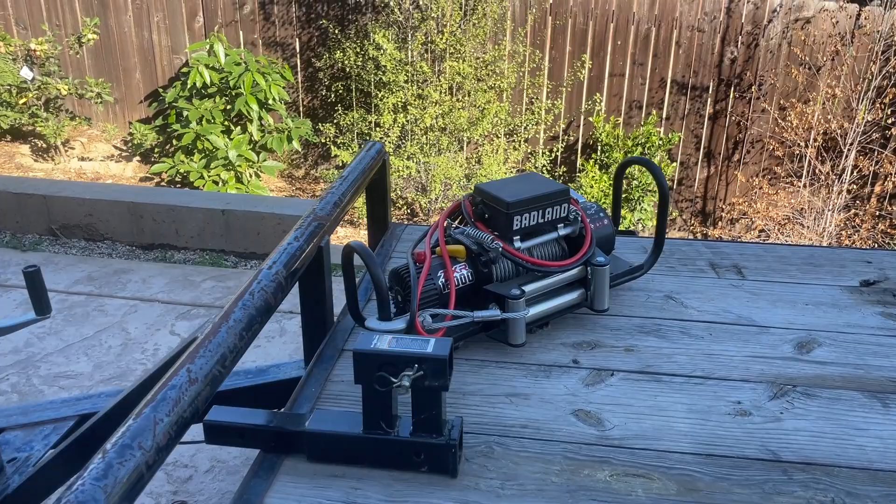I got these parts. So this Badland ZXR 12,000, man, that thing's huge. This thing's pretty badass. It pulls a lot, but we need to put this thing on the trailer, and I have it hooked up to this other part you can get from Harbor Freight to make it to where it'll go into a trailer hitch.

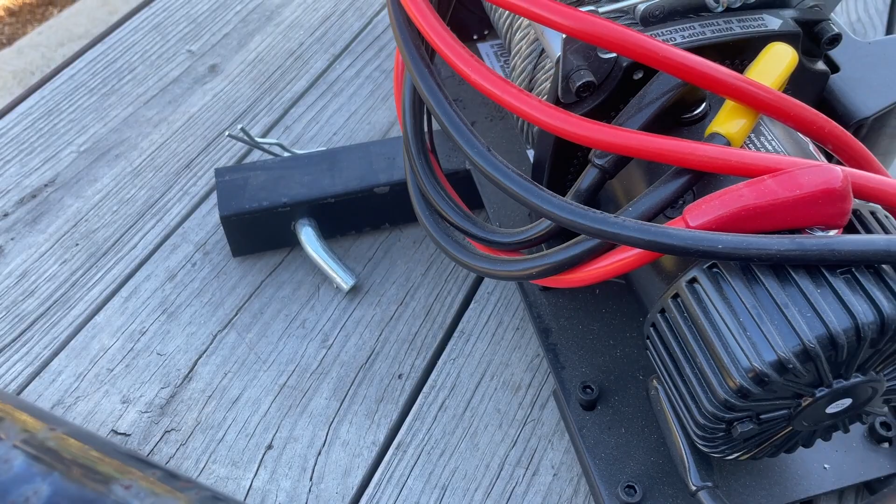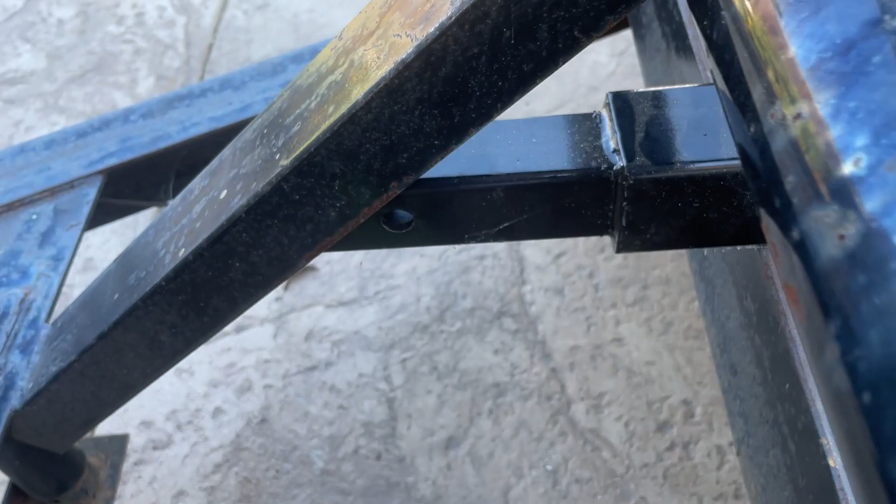I got this thing from Harbor Freight, which I wasn't planning on using for this, but it actually will work out. What I'm gonna do is push this thing up into my trailer. I'm gonna cut the end off over here, weld it in over here, again with our Harbor Freight welder. And I'm gonna bring this thing in, radius this and weld it to this top tube, and then it should be pretty good and durable.

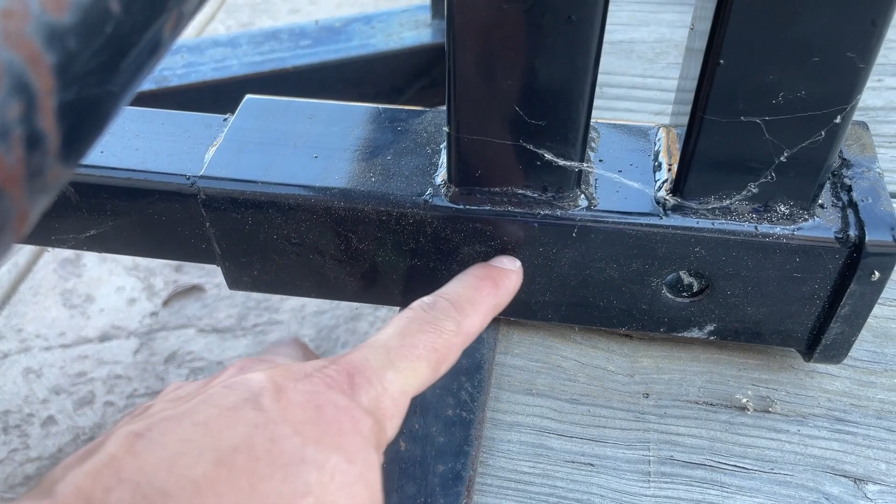I will also get on my plasma cutter, my Langmuir Systems Crossfire XR, and make some brackets here just to shore this thing up laterally, and I think this will be plenty strong to be able to pull the truck up onto the trailer. Let's go ahead and get to it.

All right, I like cutting with an angle grinder. I'm always impressed by what you can do with an angle grinder, but I'm more impressed by what you can do with a plasma cutter. And so here is me getting onto Fusion 360 to make some parts for this build. I don't like to show the full thing. If you want to see the full Fusion 360 and how I get this part ready to go, check out the end of the video, and I'll let you watch me fumble all the way through CAD to get this part ready to go on the Langmuir Systems Crossfire XR.

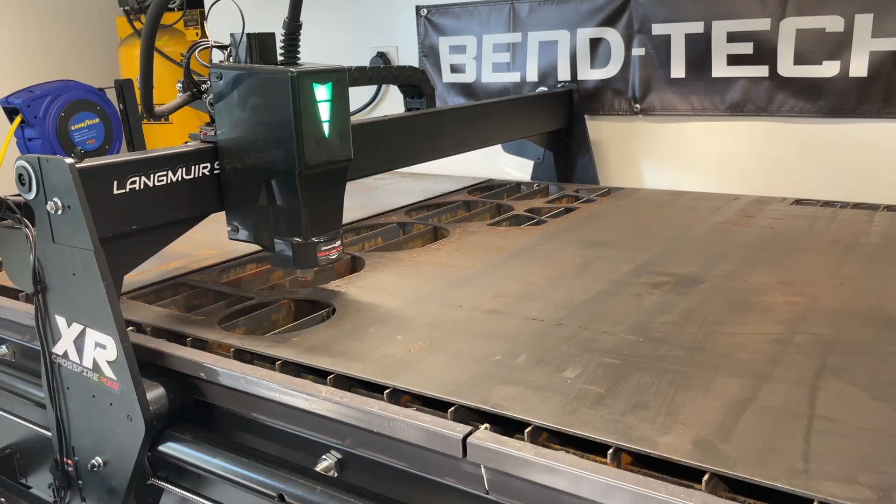All right, so this here is the Langmuir Systems Crossfire XR, and if you watch most of my videos, what I do is I make parts for my desert race truck, and this time our trailer, with this plasma table. I just put it together. I have a whole video series of putting it together and doing a couple modifications to it to work better in my shop.

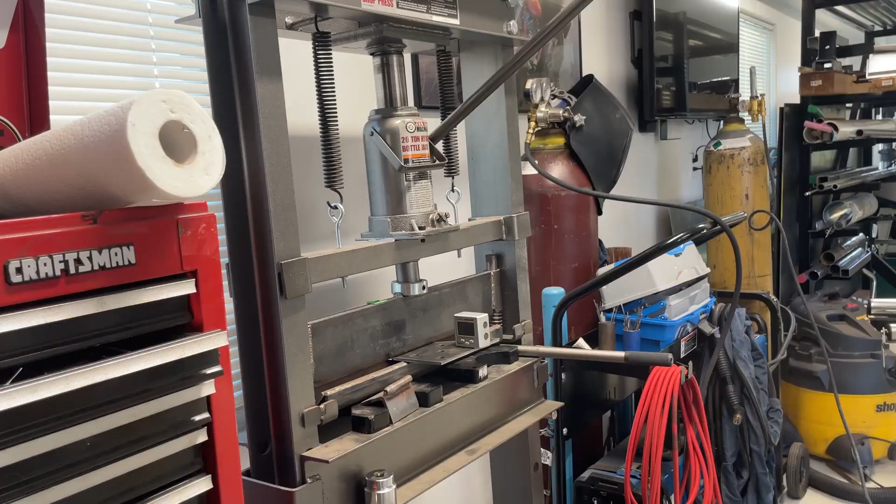Like I said, I have a bunch of tools in my shop that are just Harbor Freight. This press brake, and I'm using this Swag Off-Road press brake attachment. So the press comes from Harbor Freight. My engine hoist, my cherry picker, it comes from Harbor Freight. And if you look all around my shop, there's just a bunch of stuff. And some of their tools are just great, and I've been using them for years.

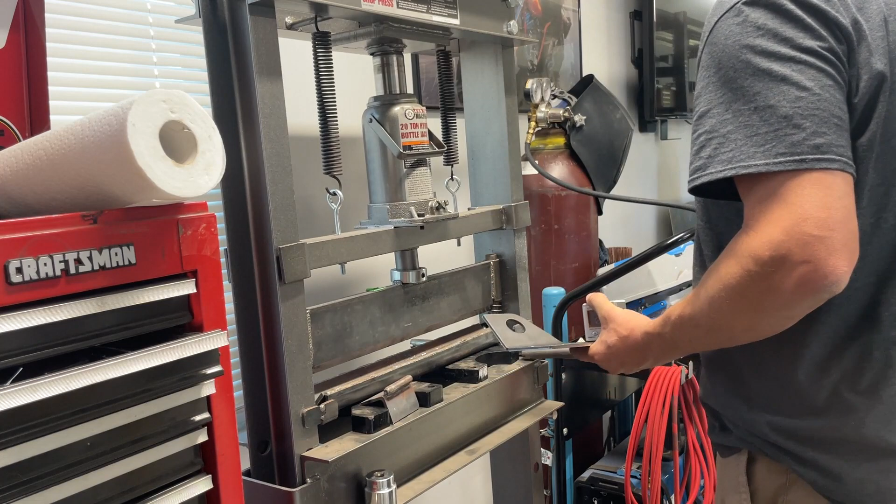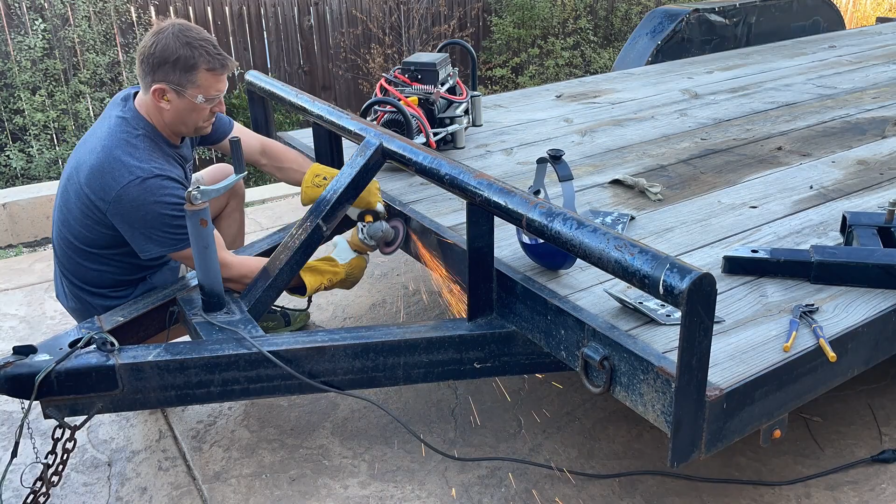All right, so we're going to do some MIG welding here. So I'm going to try and get most of the paint off and the rust off and that kind of stuff. But I don't necessarily clean stuff up as much as I do if I'm going to TIG weld. I try to get most stuff off. And looking back, I probably could have gone over here with some acetone to get a little bit more of the residue off. So I think it made some impurities in the weld, but it's a trailer, so I'm not too worried about it. But we'll go ahead and get to the welding with this Omni Pro 220.

It's the multi-process welder from Harbor Freight. And I already have one video out with some initial tests, and then here's me just kind of putting it to the test with some real world welds where it's a little bit dirtier material. It's outside. I'm using a bottle of CO2 as opposed to a mixed bottle of CO2 and argon. And just seeing how it lays down welds when you're going to be out there in the field and that kind of stuff, especially when we're going to be out there in the desert of Mexico. And I think it did a pretty good job.

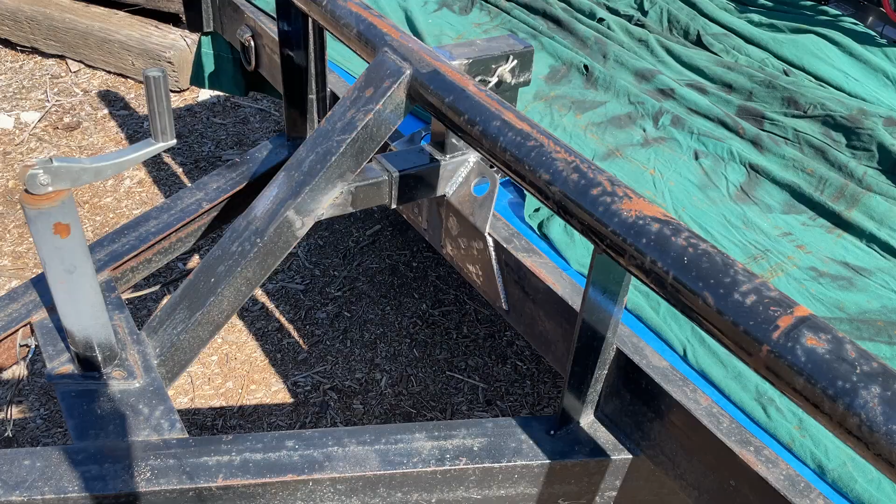All right, here's a quick look at how the Harbor Freight Vulcan Omni Pro multi-process welder worked. I think it did a really good job, a pretty good weld. Now, I was welding through some paint and everything, so not great. Also, my first time welding with just CO2 on this thing into 3/16 and also 1/4 inch, so I was running some pretty high heat. I think it did an all right job.

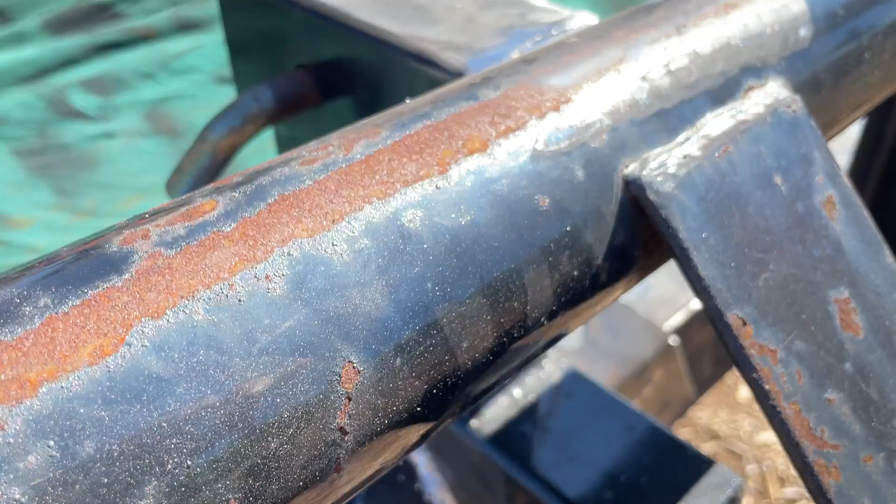Again, I always like TIG welding better, but sometimes you have to MIG weld. And some of my MIG welds look good, and sometimes they don't. I didn't think that one looked really good. I ground that down a little bit, but I think it did overall a pretty good job. The nice thing about it is once you spray paint these things, they all look good. So we'll go ahead and spray paint it and see how she looks.

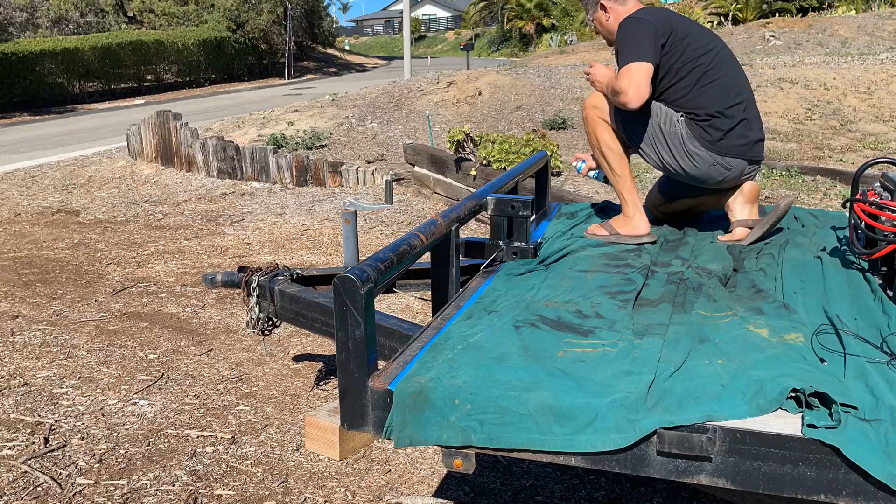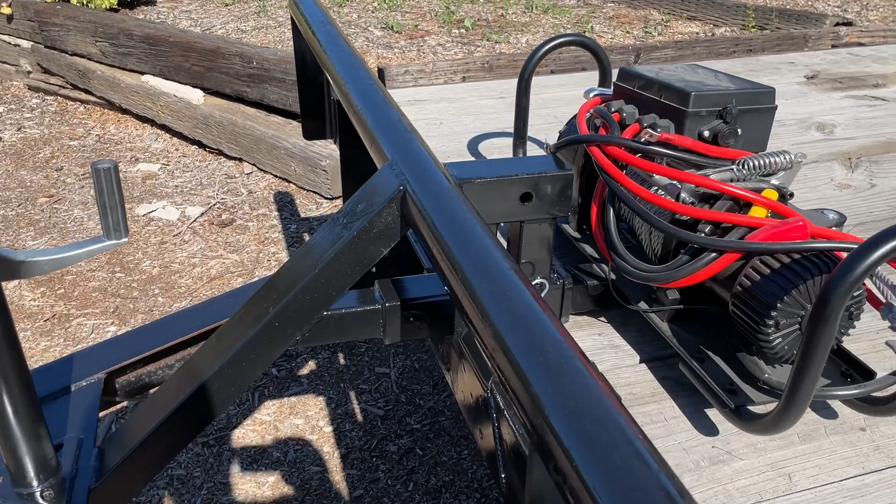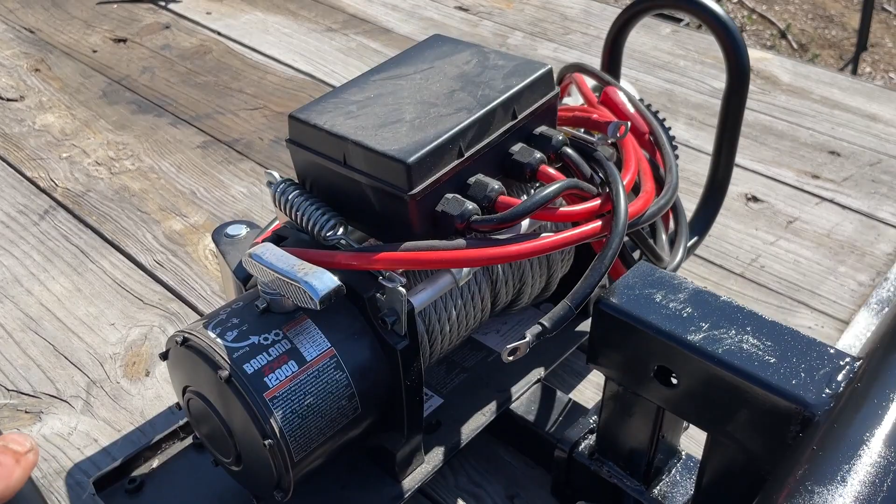All right, let's take a look at this mount. All painted up. I think it looks really good. As you can see, all welds look a lot better once you paint them. And these welds, maybe not perfect, but they will last forever, pretty much. Again, all kinds of props to Harbor Freight. They're making some really cool stuff with this Badland ZXR 12,000 winch. I bought this. They didn't pay for this. So I'm not getting paid anything for doing this, but I would say that the winch works pretty well for the application that we're using it in.

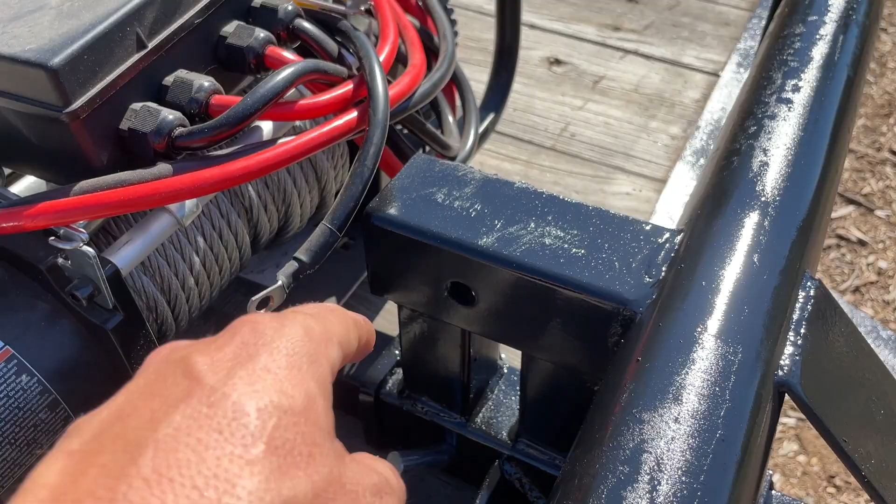So we got this from Harbor Freight, the winch. We got this rack right here, which allows us to put it into any kind of truck receiver, and you can see that works on there pretty clean. And what's really nice is since the way I welded this up, I can put it into the bottom one or the top one. I've also got a little D-ring I'm going to put in the top to basically secure our tires down in the back. But anyway, I think it came out pretty good.

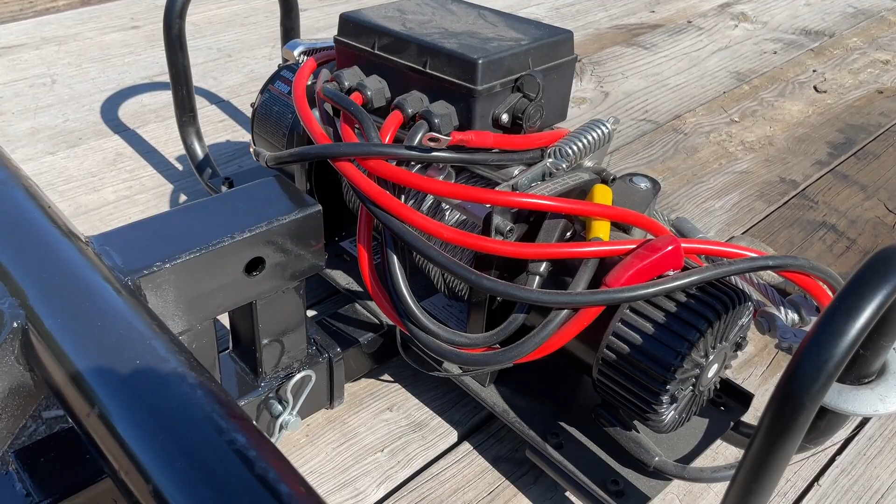All right, so like I said, I'm not an affiliate for Harbor Freight, so I don't get anything from them for making this video. I just like some of their tools, and I think that their quality is getting better, and I think they're testing at like 3 different facilities out there. And you can see it in the quality. I think that winch is awesome, and I also like their welder. So far, it's been pretty good. As we put that welder through a longer term test, before I go and tell anybody to go out and buy it, I'm gonna test that thing and see how it really works, especially out there in the field.

And with that, we are taking this thing again out to the field. We're going out to Ensenada, and in a couple days we will drive 1,227 miles down to La Paz. Imagine that. We're going to be going basically from Dallas to San Diego on the gnarliest roads you've ever seen.

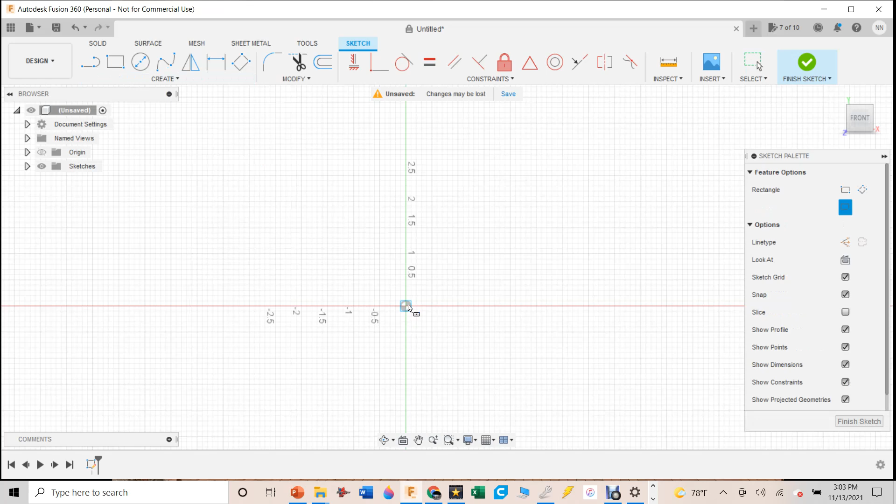So you know what, I'm just going to start right on the center origin because I don't have a better plan. Let's go rectangle. I always use the center rectangle. I start over here in the center, and let's make it just 7 inches by 7 inches. And that'll be about the size of this thing. Now it's going to be kind of a triangle, and it's going to be bent also. So I'm going to bend it about the 3-inch point.

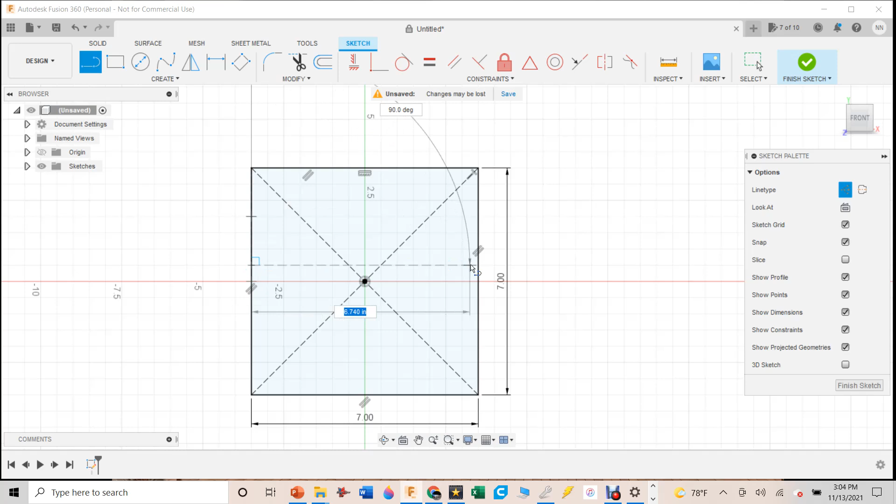So starting here, let's go 3 inches down. There's 3. And I'm drawing a construction line there. Hopefully I'm drawing a construction line, and then drawing a construction line all the way across also. And that'll be just kind of my reference for where I'm going to bend this thing over.

From there, I want to put a hole just somewhere in here. And to put like your standard ratchet strap through there, it's about just under 1 inch wide. So I figure if I put in a 1.5 inch hole, and maybe 1.3 makes a little more sense. Not 0.3. Let's change that to 1.3. And then I might even be able to move it just a little bit closer up to the corner, because sometimes it's tough to hook a ratchet strap over something if it's too far away from the edge of the hole. I think that will be pretty good.

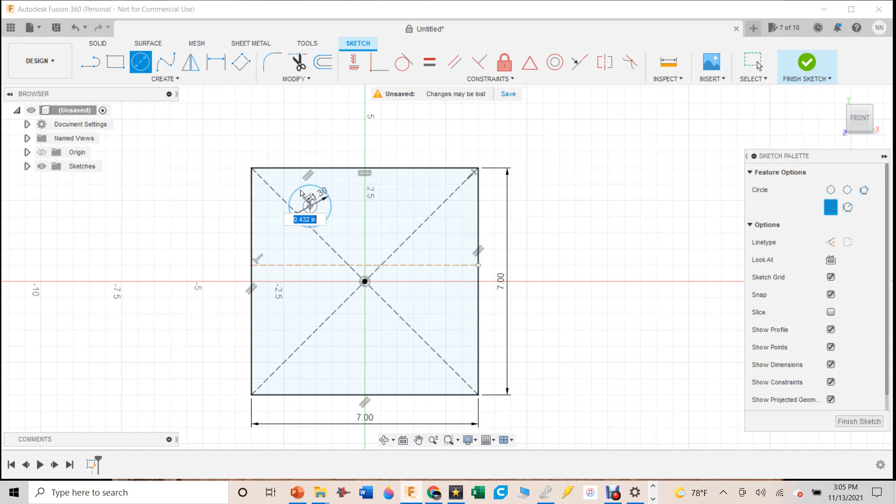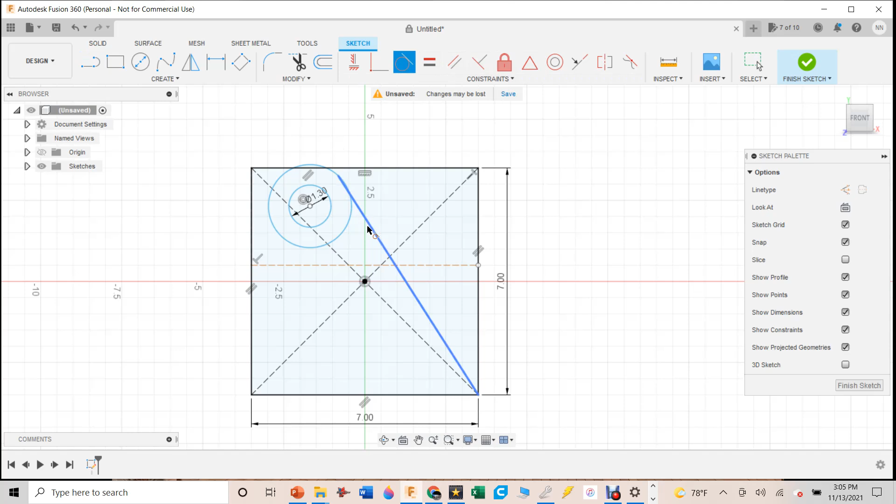I'm going to put another circle around this, and we'll just make it tangential as best we can to that one. And then I'll give us something to make our lines off of. Let's go from here down to, say, over here. That looks good enough. And then I'm going to say make this line tangential to that circle. I think that's going to be all right the way it is. I kind of like that.

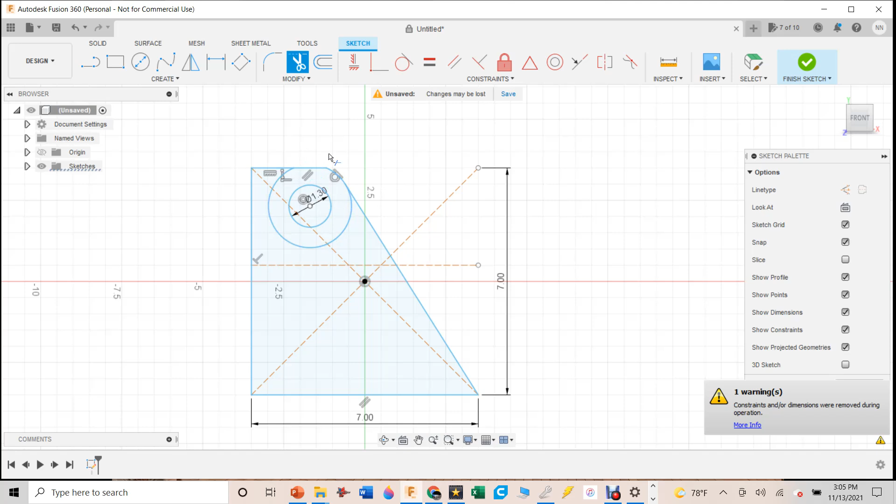All right, I'm going to cut some things off here. I'm going to cut this off and that off. I'm going to cut this top off. I don't need it. Doesn't matter. That is irking me just a little bit. That's fine, the way it is. Okay, so this piece is basically going to fold down. So I'm going to be welding across here. So what I want to do is give myself somewhere to put just some rosette welds.

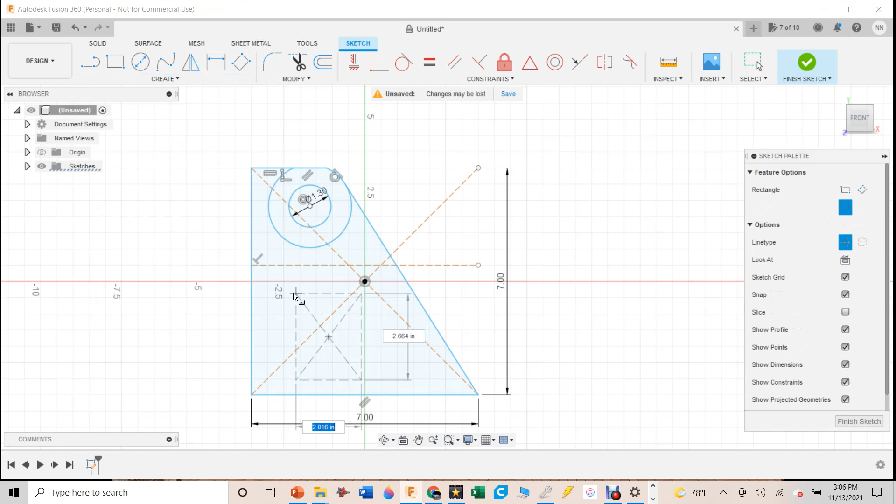So let's go ahead and turn back on the construction lines. I'm going to do rectangle, center rectangle, just somewhere down here. And that's going to be pretty good. Hotkey C is going to bring up my circles. I'm going to turn off construction lines. And let's just go 1/2 inch circles for rosette welds. 0.5, 0.5, and 0.5. And right here, we'll put a 5th one in there. Might as well. Doesn't cost nothing.

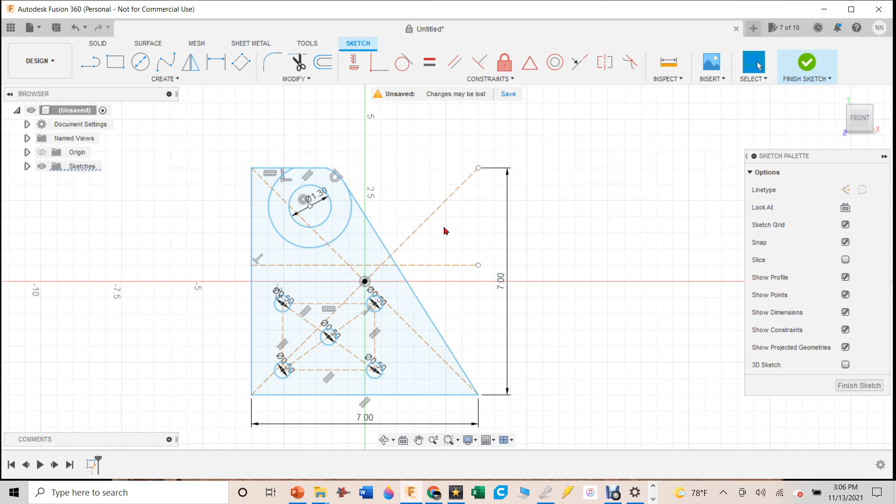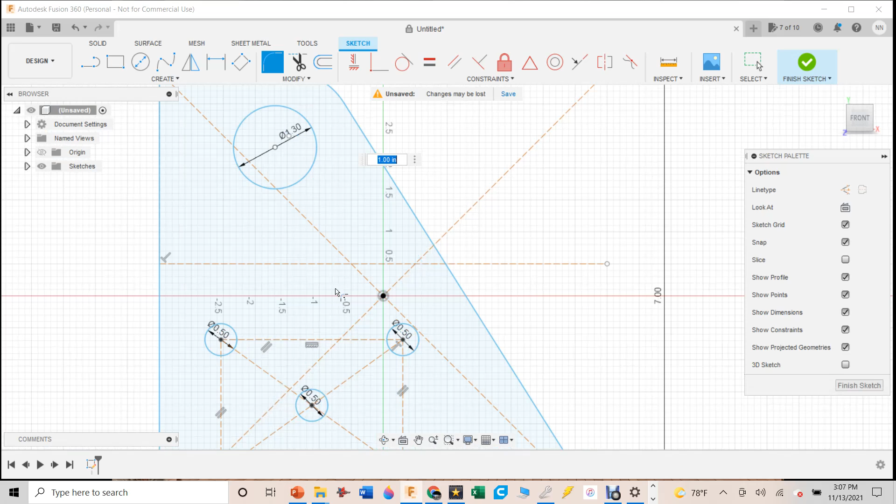All right, so there's the part. I got to cut some more stuff off here. I'm going to cut that off, and that one off. And then this isn't the smoothest corner in the world, so let's radius between this and this just to make it look prettier. There we go. So there's my part. Now I want to bend it in my press brake. So what I'm going to do is go down here. I'm going to give myself a circle. I'm going to say a 0.2.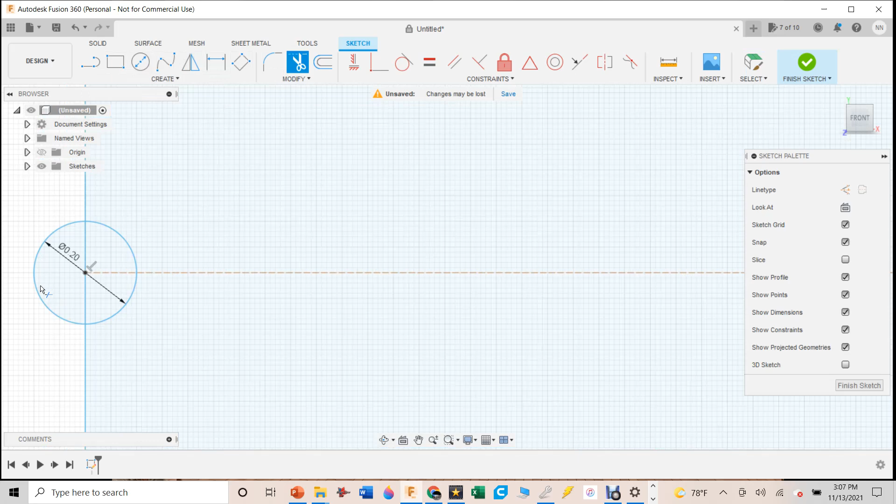And what that will do is when I plasma cut it in my Langmuir Systems Crossfire XR, it's going to put little nicks in there, and that will make it so that when I put it then into my press brake, I will be able to just identify where that basically 90 degrees is. It'll make it easy for me to line it up in the press brake, in other words. So there we go. I'm going to cut that off. And there's the part we're going to cut.

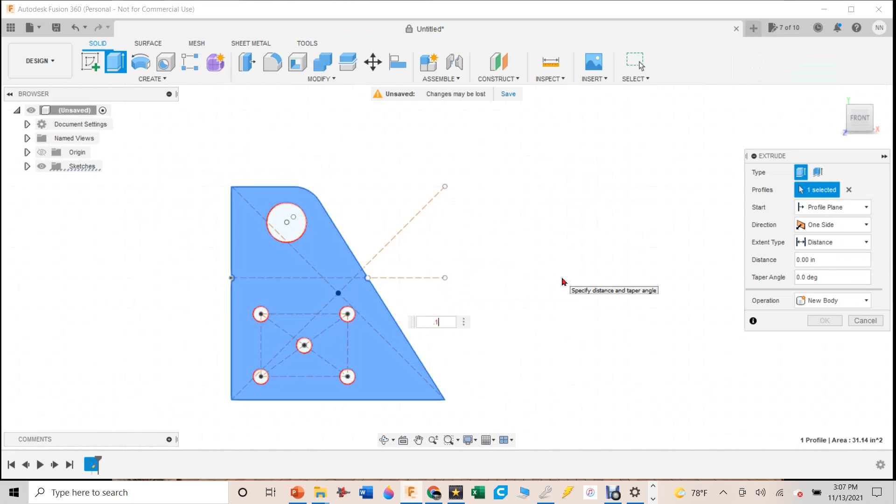All right, let's hotkey E for extrude. We're going to extrude this part, and it's going to be 0.187 for 3/16 inch steel. There's our part we're going to make. All right, let's go ahead and go to manufacture, setup. You know what? I got to go back to design because I want to make 2 of these.

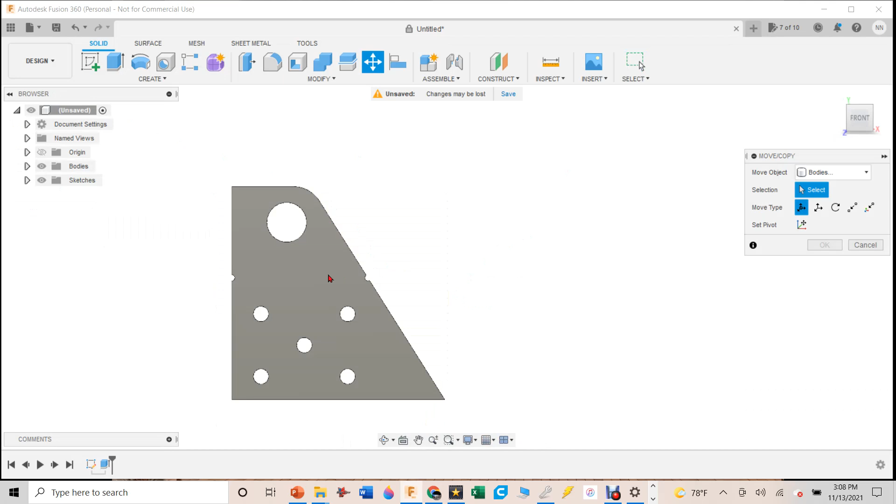So let's move it. Let's select this one to move. Let's create a copy. Let's move it over here. Let's spin it 180 degrees. And then now we can kind of nest it ourselves over here. So there it is. Now it's nested. Now we got 2. Hit enter on that. Now I can go ahead and cut it.

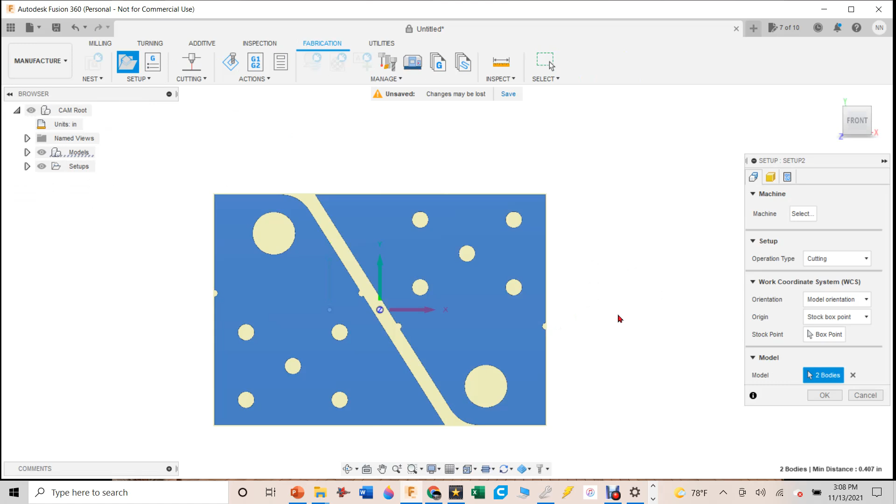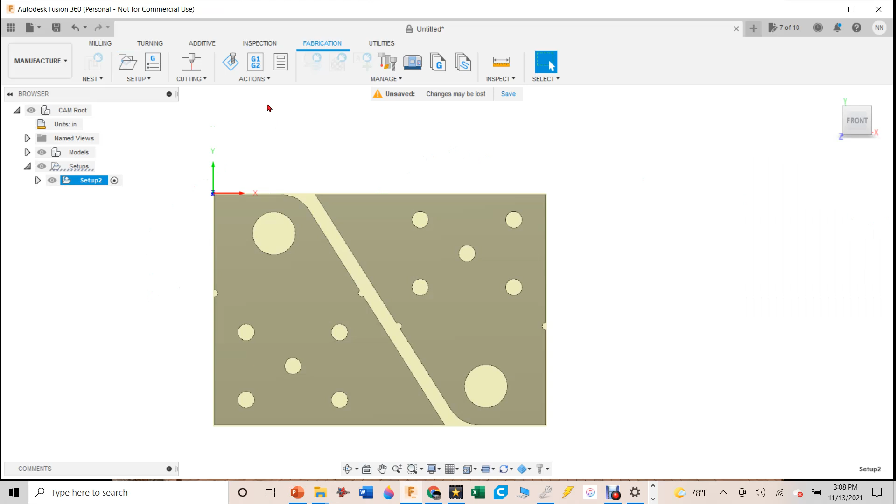Manufacture. I'm going to go setup. Let's select both of these. And I always generally pick, and it doesn't matter what you do, but some people pick different points. I pick that top left point because that's the way I work through my sheets. It might not be the best way to do it, but that's the way I do it. And I'll call this Harbor Freight hitch bracket. All right, there we go. There's my part. And now let's go to cut it.

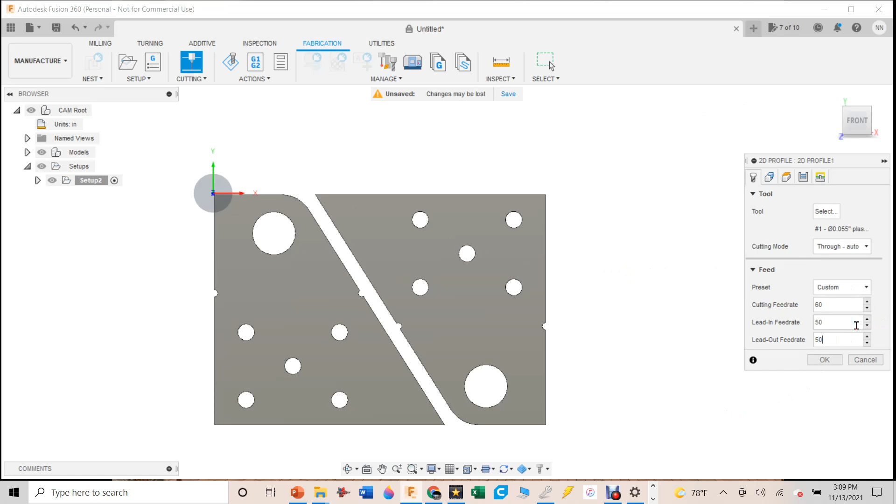I am going to select my tool. I'm still using the Razor Weld 45. This thing has been awesome. And one of the things that I've learned while I've been using this is that it cuts with the machine torch. I don't know, maybe it just seems like it cuts a lot faster. So usually I cut 3/16 at 50 inches. Let's go up to 60 inches and see if it'll cut it. Let's do a lead in at 50 and a lead out at 50. Just kind of making numbers up here a little bit. I'm probably pretty close. Pick these contours.

And then, you know what? Some guy told me that he was using a lead in and lead out radius. And all these circles, I could probably put a 0.2 on there. And let's see if that will work. And I'm going to enter right here. I'm going to enter right down here. Let's see if that changes the nicks that I was getting on lead in and lead out.

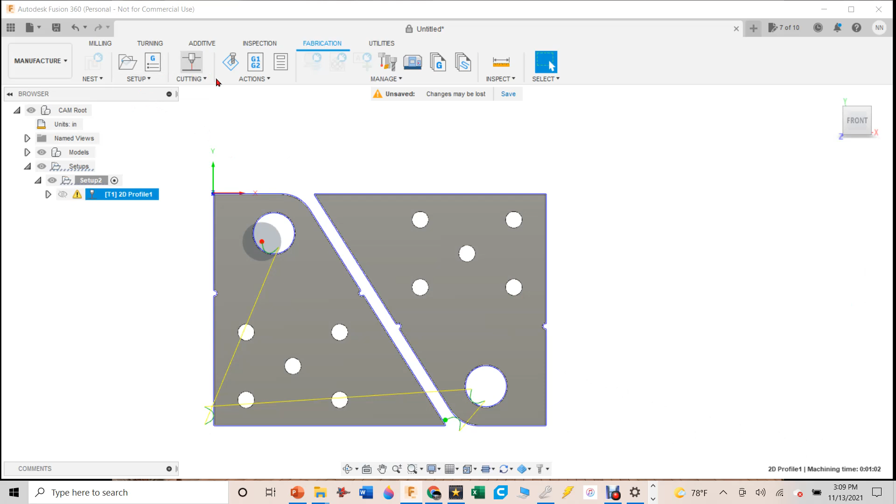As you can see, I made those lead in and lead outs too big because you see I don't have any tool paths here. So I got to go back to cutting again, kind of start over. At least that information is still there. But what I do have to change is if I'm going to do this lead in at 0.2, I probably need to change this lead in distance down to 0.05 or something and make it a lot smaller. And then I can do my entry and my exit there. And I bet you now it'll pick up those holes that I didn't hit before.

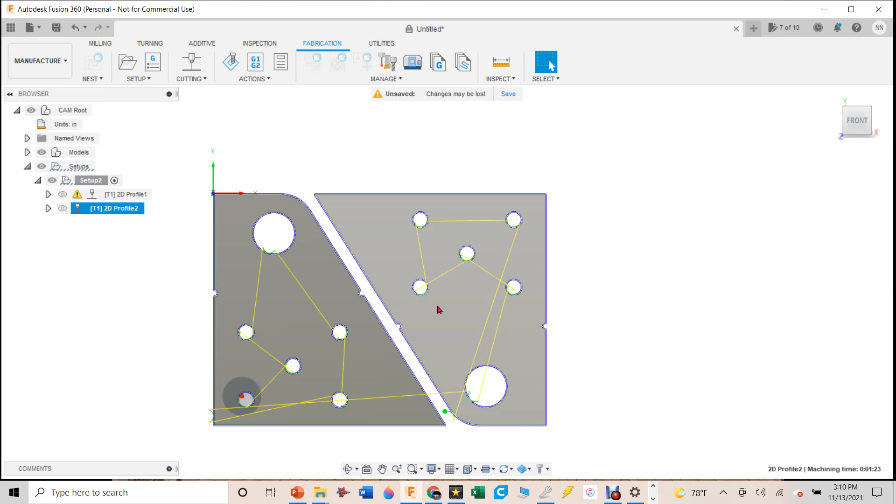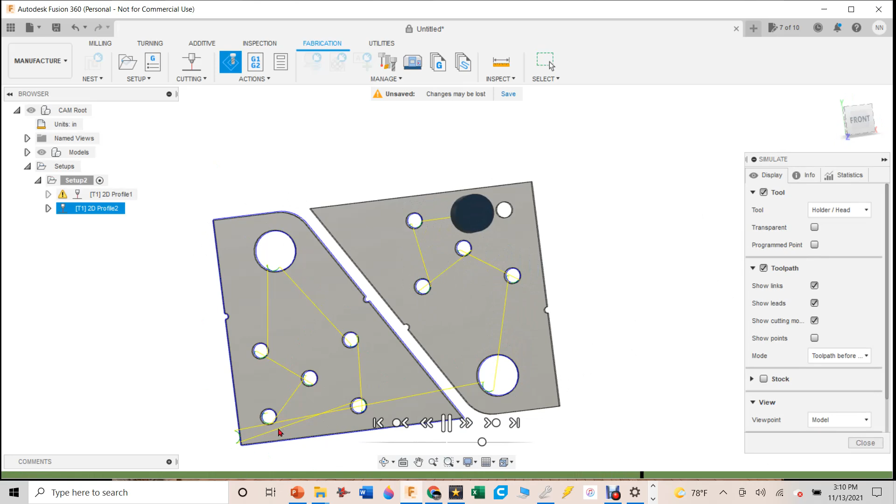Boom, there it is. So you can watch it if you want as it goes through and animates how it's going to cut. You can speed it up a little bit so it goes a little faster. And you can watch how the tool is going to work through there. One of the neat things about watching it like this is you can see, oh, geez, you know what? Once it goes over that thing, you can watch its track and go, if this one tips up, it might actually hit the tool. So you know, hey, I better watch it to make sure it doesn't tip up. Or what you can do is maybe even change your lead in and lead out to somewhere else so you don't have the problem with the tip up.

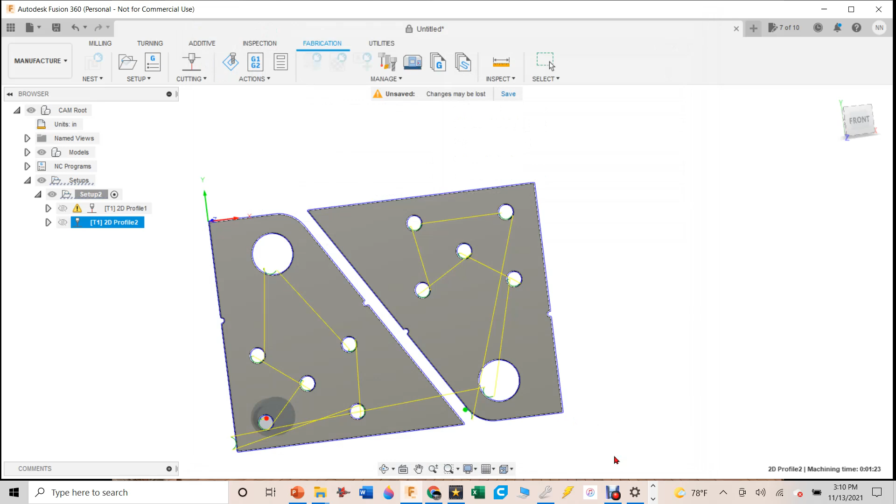So let's go ahead and make the G code. The pierce delay, you know, I was using half a second before, and for the 1/8 inch, I've gone down to 0.05. Let's try it. Let's try 0.05, and we'll go with that again for the pierce delay, and I will save that. Let's go down to my XR, get it full of water, and cut this part.